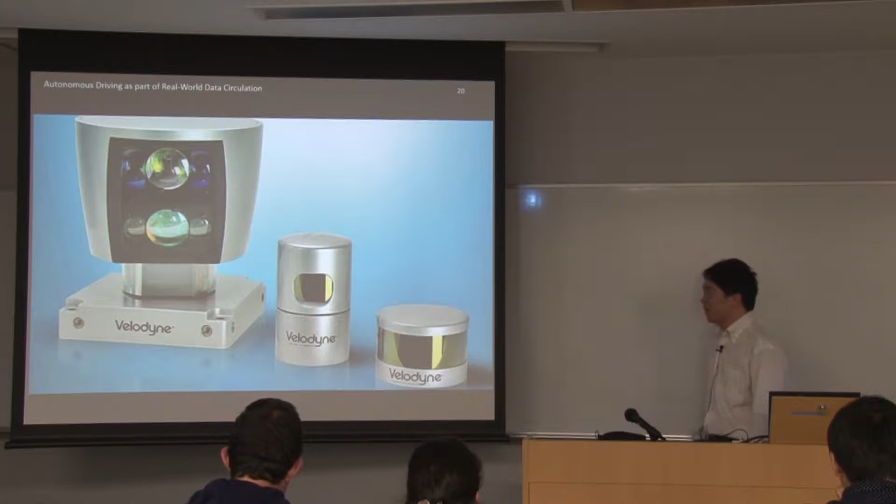This is expensive. So that's why you need a rich leader - asking him to buy one, and if it works, asking for another one, and another one.

And sensing is a hybrid of information science and engineering. When you buy sensors, you have to install them on the target system - in my case, which is a vehicle. So my student, every time we start some experiments, goes right on top of the vehicle and attaches the sensor to the vehicle, then finally we can start the project.

We did this installation every time for 2 years, but finally we got a garage, so we don't have to detach the sensor every time. We used to detach the sensor every time because I didn't want it to be stolen. Now we have a garage that can be locked, so we don't have to detach the sensor.

But anyway, some engineering happens if you work on data. So sensing is collecting data. And you may think that since you are in information, measurement, then you can assume that data already exists there. But maybe sometimes it's good for you to collect data yourself.

I think we did in Data Tools Next, using smartphones to get some GPS information. That was a good example of collecting data. But if you look at the real world, there are more case studies.

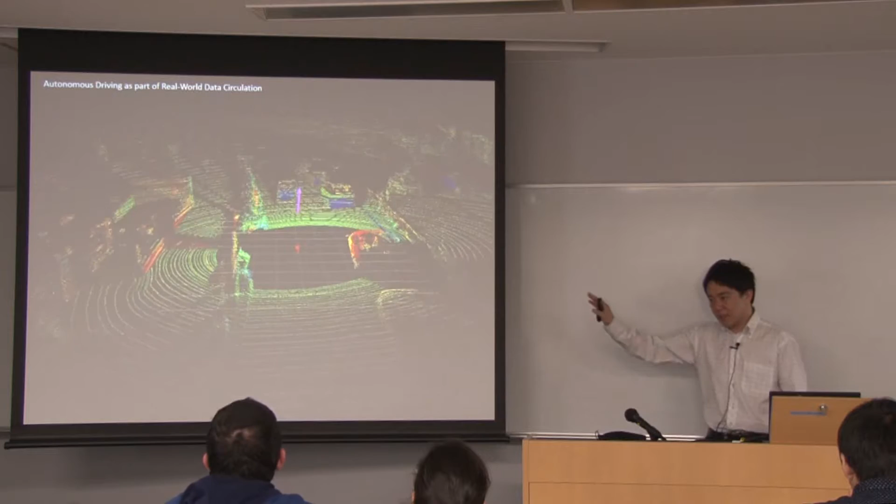For example, this is a scanning sensor. This scanning sensor can be physically attached to the target system. This is amazing because you don't have to write a single line of code - just attach the sensor to the vehicle, download some software, click a button, and then you get this information - three-dimensional real-world information obtained in real time.

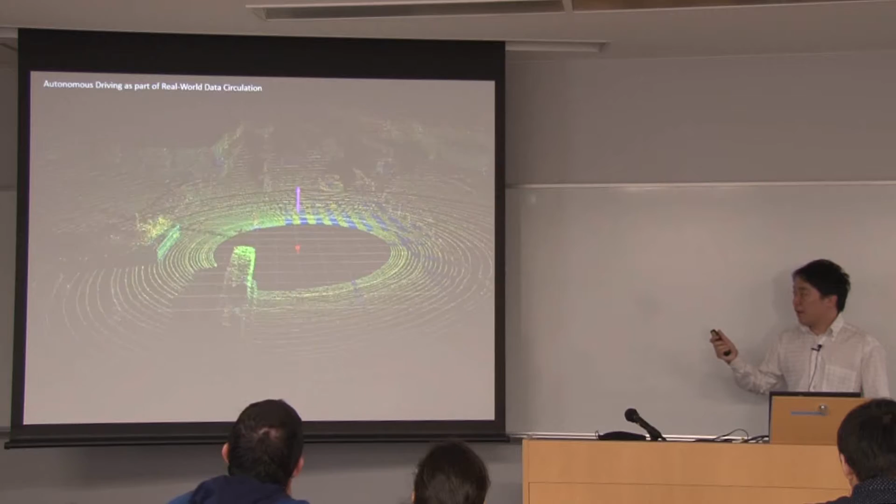And this is called a laser range finder, or LiDAR - laser LiDAR. There are a lot of names that represent this sensor, but this is one of the most amazing sensors I have ever used.

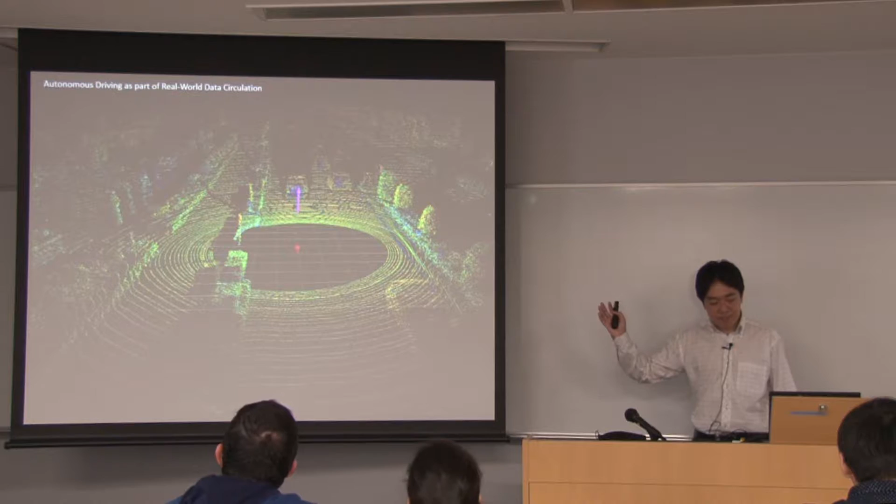So we want to use this kind of data for something innovative. One thing that actually first came into my mind is to detect your location using this sensor.

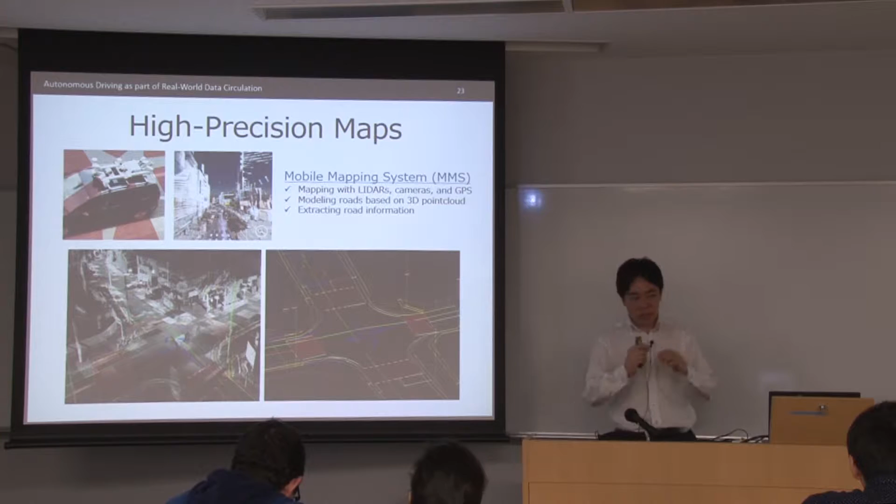So again, this is the problem of managing data. In my case, we use a digital map, three-dimensional maps. This is a collection of points. If you store this data into your computer, then you can manage, for example, the shape of road, or the shape of buildings, or the shape of the real world in a computer. Since this is three-dimensional, you can change the angle of the data.

This is amazing to me, since I was not very familiar with data management. But when I asked some company to make the three-dimensional map of this, Motoyama Road, they just gave us this map. It was surprising to me that this is already possible in industrial service.

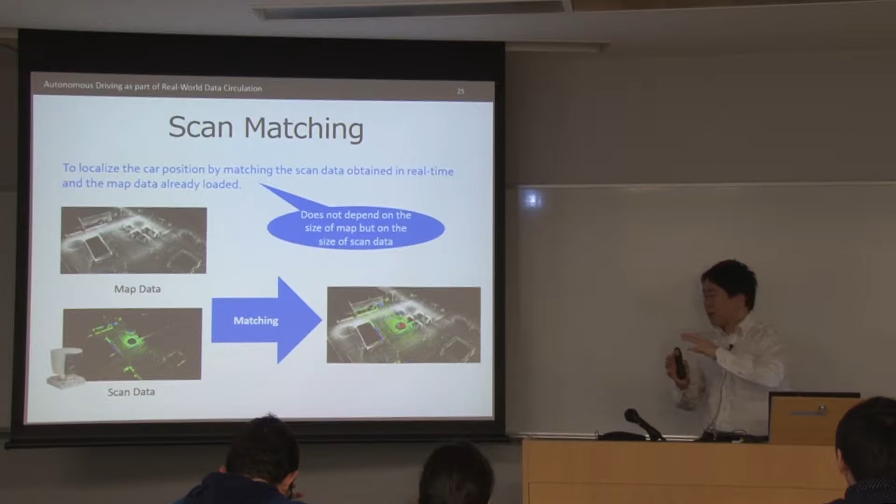Once you have three-dimensional maps and you also have sensors, if you do matching of real-time sensor data and map data, then you can find where you are. Real-time sensors can obtain the shape of your surroundings in real time, and you also have three-dimensional maps. You can find where is the most matching place to the data which you got in real time from sensors. Then, for example, hey, we are here, which is called scan matching.

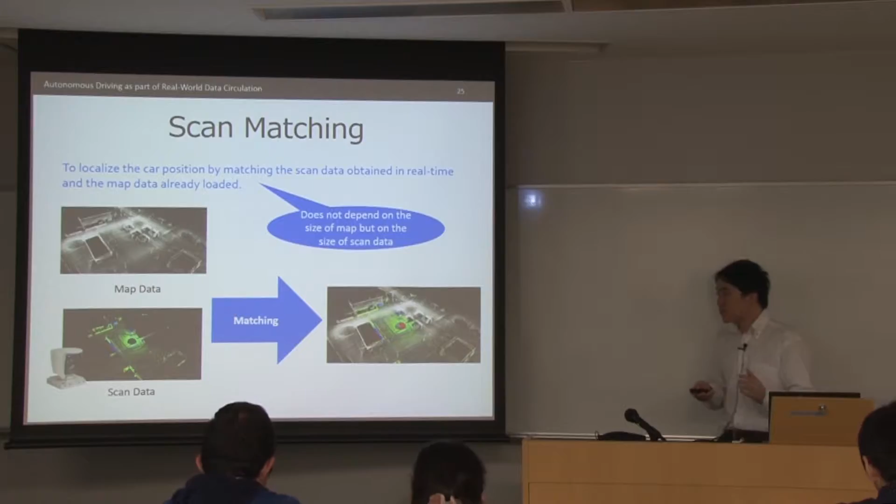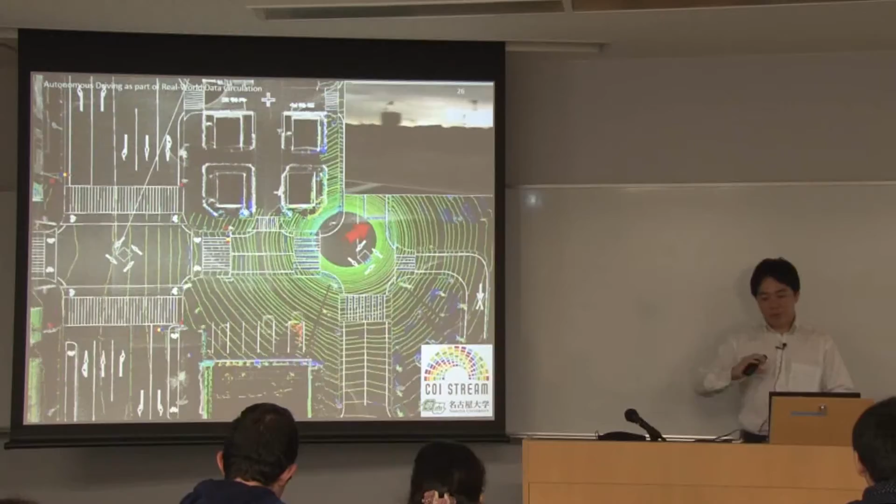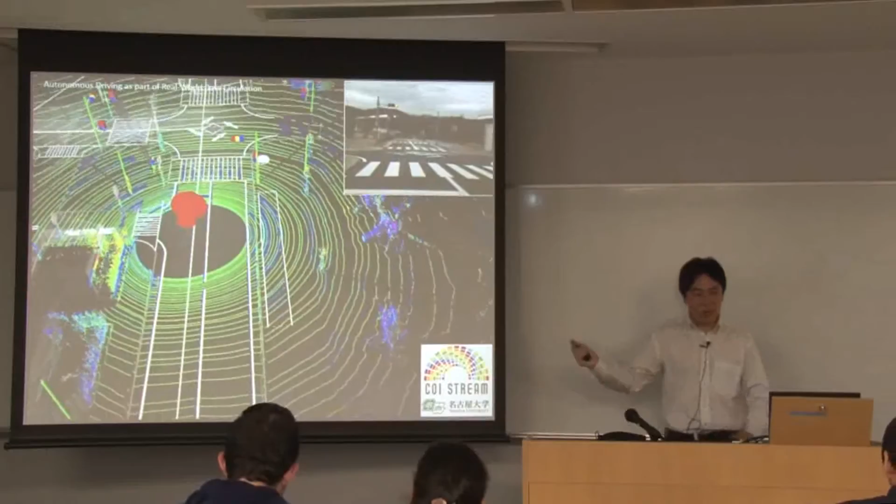And this works very well. So this is our test course, and we made a map of the test course. Then we check where you are driving by using real-time sensors. By the way, this is made by Kitsukawa-kun, one of my leading students. And we can actually locate your position within an area of 10 centimeters.

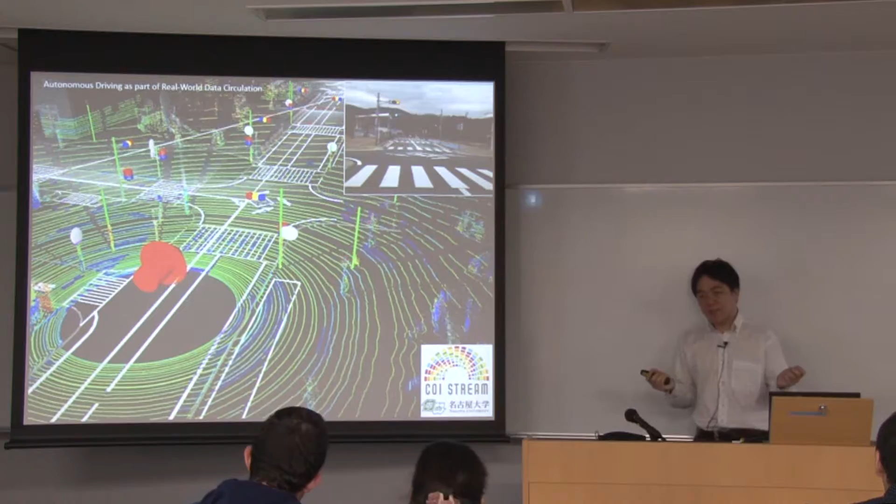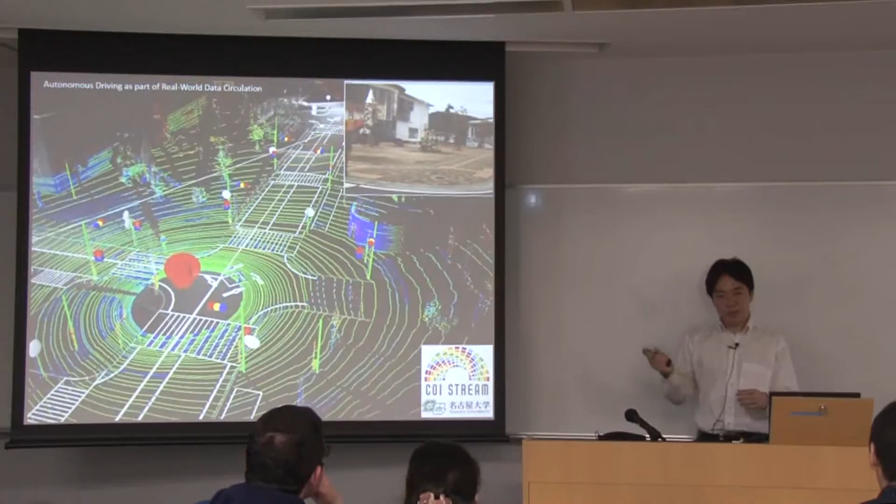It's really precise. If you buy expensive GPS, which, for example, military is using, still you can only detect your location within an area of 1 meter. So using sensors and a three-dimensional map, you can get almost 10 times more precise localization or positioning.

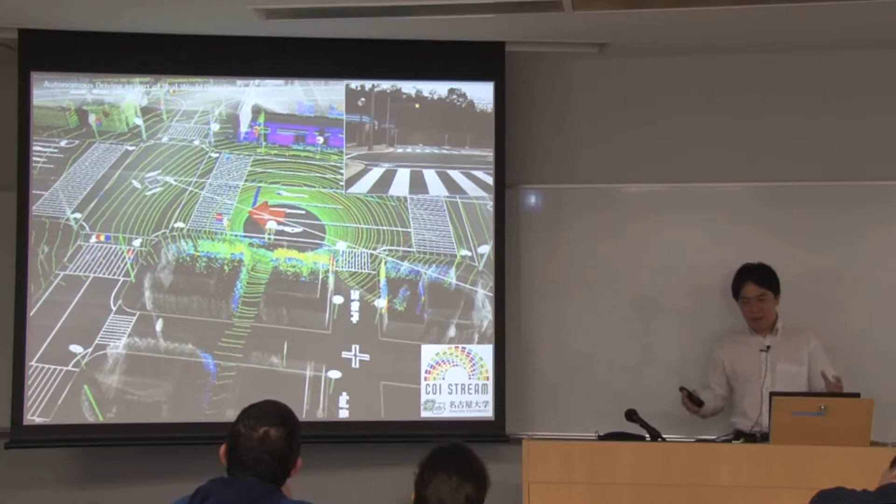It didn't really take so long for Kitsukawa-kun to make this, because we have a lot of tools and software. Since you have a big team, if you ask your colleagues what kind of software or tools would be useful for doing this, everybody can tell you. So you can save your time to build this kind of system, compared to the case where you just work alone. That's why I also recommend that you work with some people, so you can save your time.

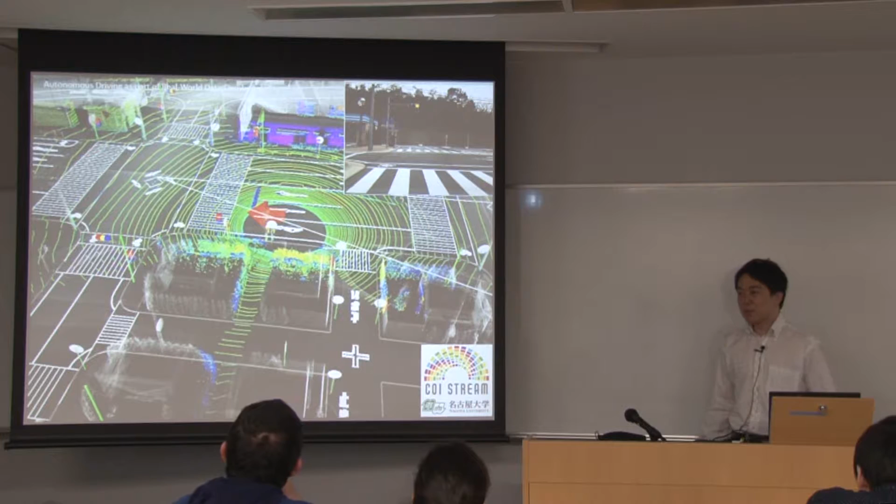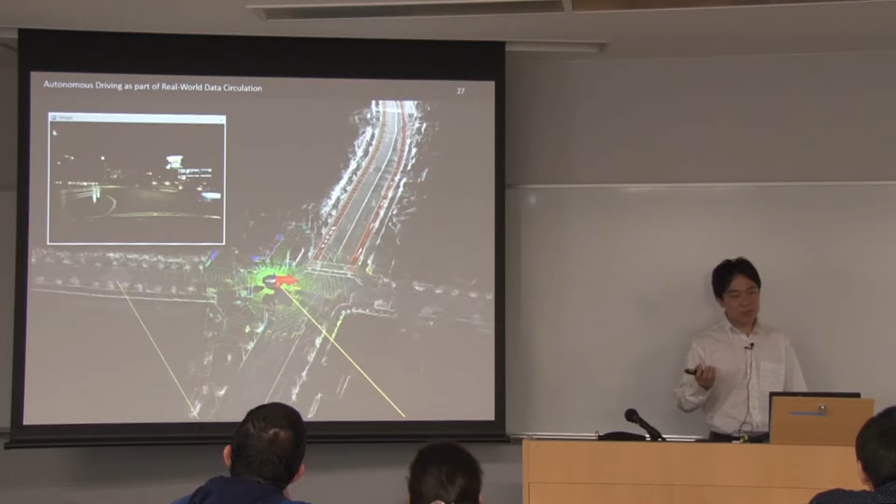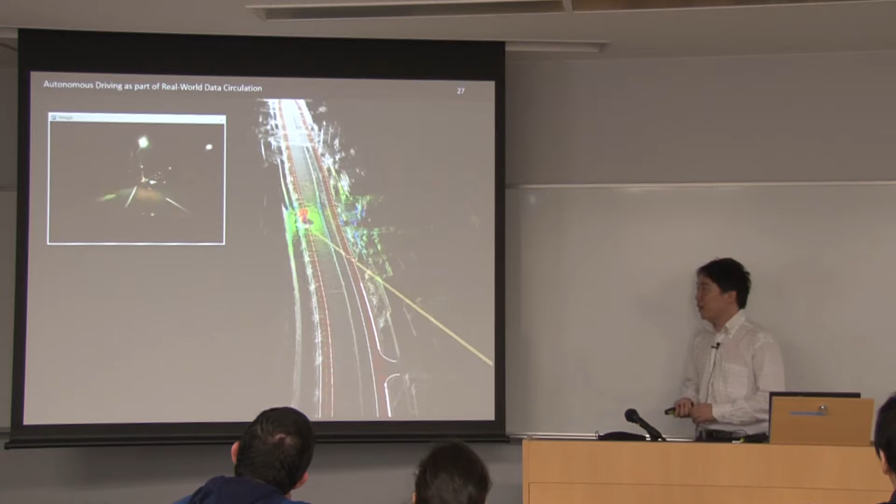Once the experiment in the test course succeeded, the policy of my team is, let's go for the real world. So this is the real world, and actually not in daytime, this is almost midnight. Cameras cannot see anything, but this sensor is intelligent. It doesn't get affected by darkness. It can still detect where you are. So even at midnight, you can drive autonomously, recognizing your position precisely.

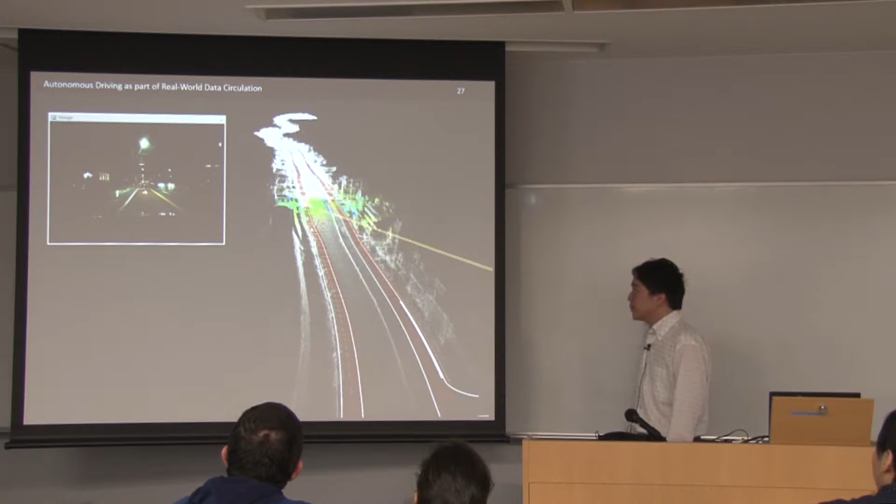The question is, I don't want to ask some company every time to make a map. So I asked Kitsukawa-kun if he can build a three-dimensional map by himself. He spent a couple of months, and he actually did it, also supported by a lot of teammates in my team.

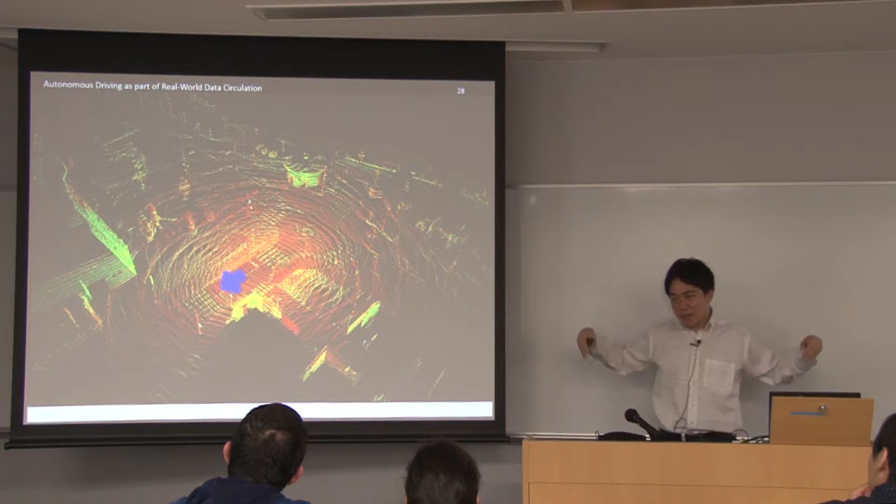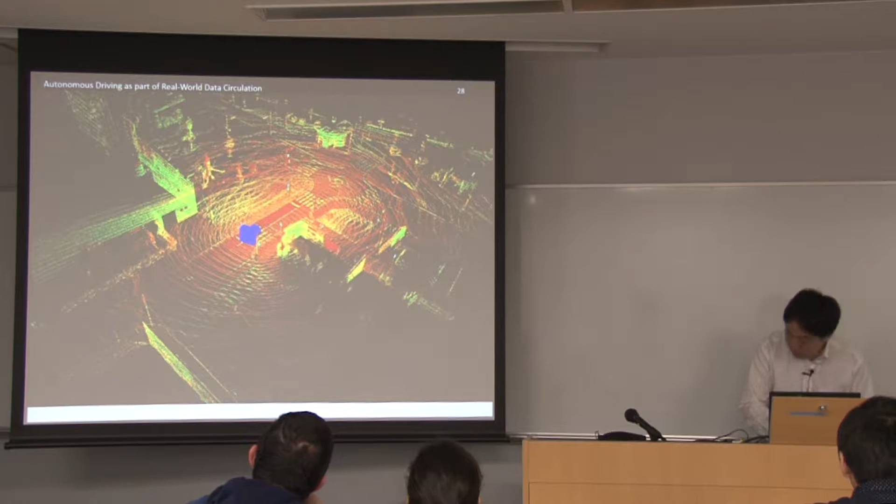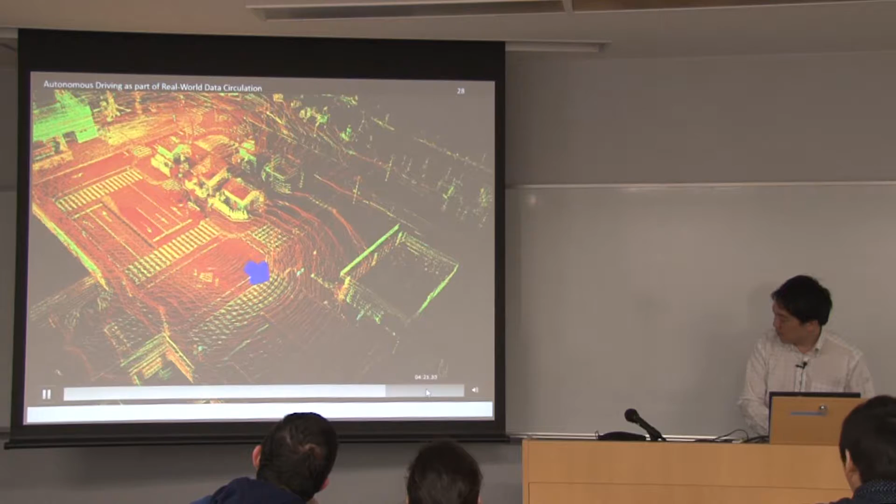Since you know where you are very precisely, you can just keep collecting the data from sensors. And if you keep collecting three-dimensional data, then just wait a few minutes. You have this. You have this. And you have this. So when we asked the company to do this, it took a month. But using information science or information engineering, cutting-edge technology, it took only 3 minutes.

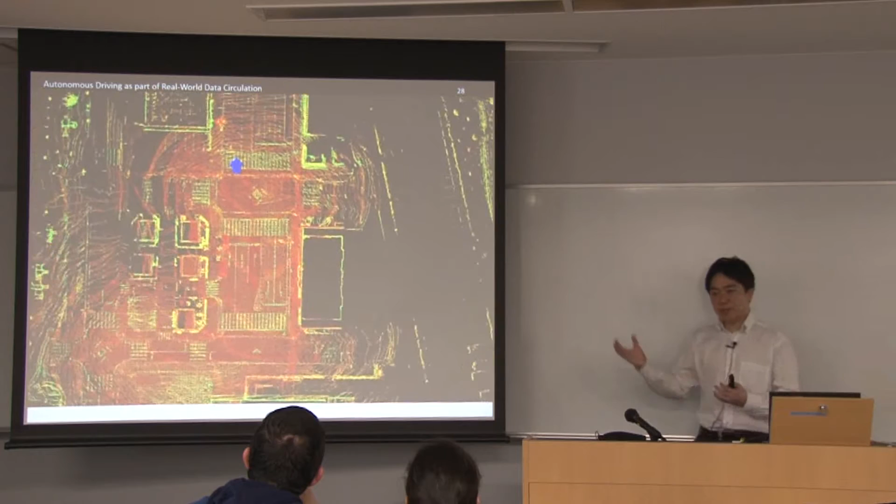So this is going to be good collaboration between university and company, because the company was surprised by this demonstration, since they take every time 1 month to build a map, but Kitsukawa-kun just did it in 3 minutes. So now we are planning to sell this technology as a product. Since you are in a leading program for industry, it may be a good experience for you guys to find companies which can collaborate with you.

Then try to make a service together, and you may be very happy if your skills and your research project can be translated into the real world. So what the company wants to do is something like this. The company has a dense, precise map, which they developed, taking a month. But sometimes the map is not complete, so we can complement this three-dimensional map by using real-time data.

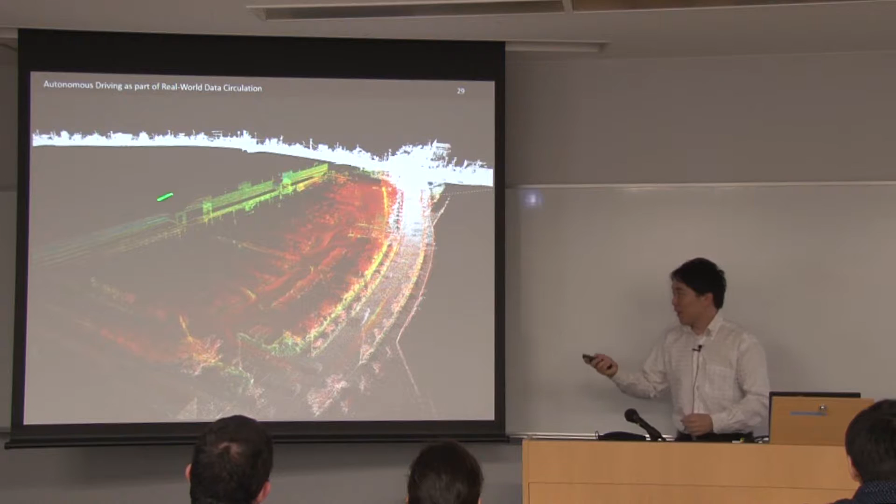To make this map, the company actually uses a specialized vehicle, which costs $3 million. So they don't want to bring a $3 million car to map a small space, because it's very risky. So we can use maybe less expensive sensors to complement the data.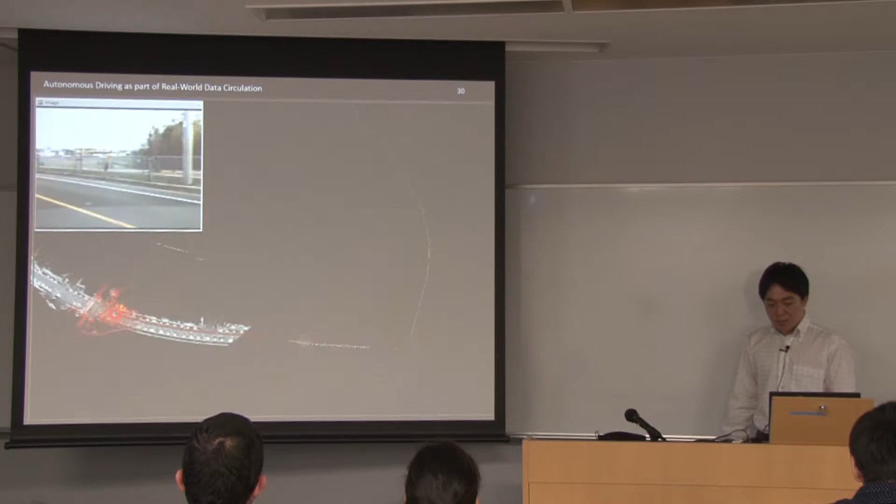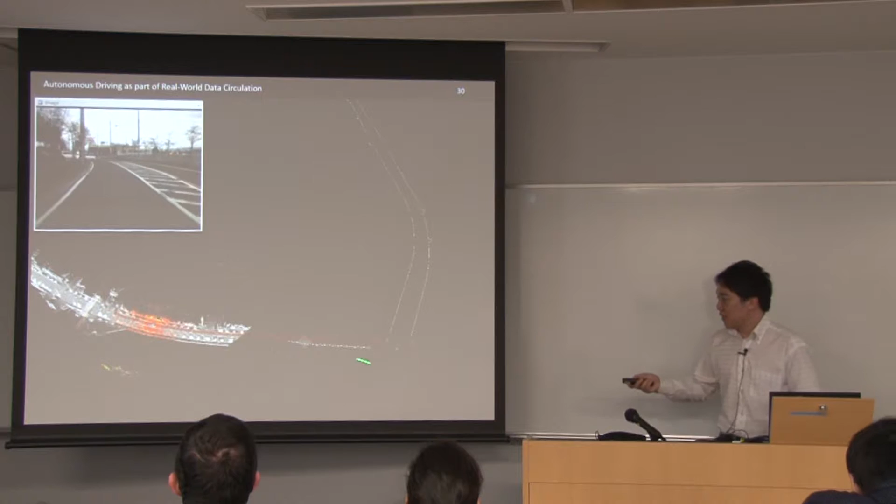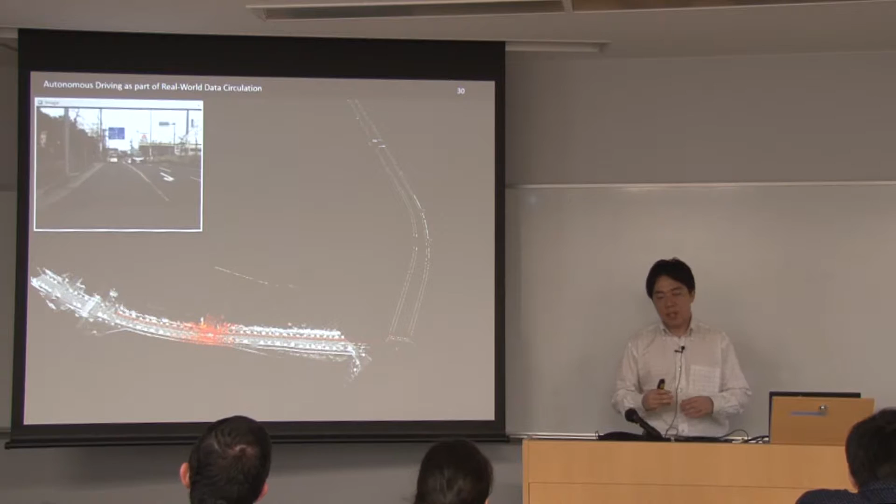So this is maybe the final thing I can introduce, also made by Kitsukawa-kun. Since this map data is heavy, it could be a few hundred megabytes, or even a terabyte, if you want to cover the whole area, say this is Moriyama district.

So the idea is that you only need a limited space of three-dimensional map, where you are driving, and you can update it. Since you know where you are driving, you only need data, for example, in the range of 300 meters. So you can keep updating the data and kill unnecessary data, saving a huge amount of storage and memory, but still do the same thing.

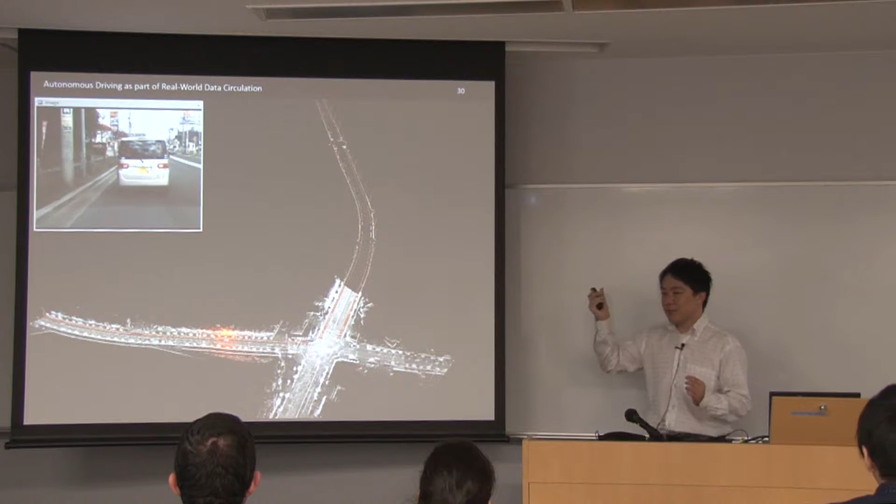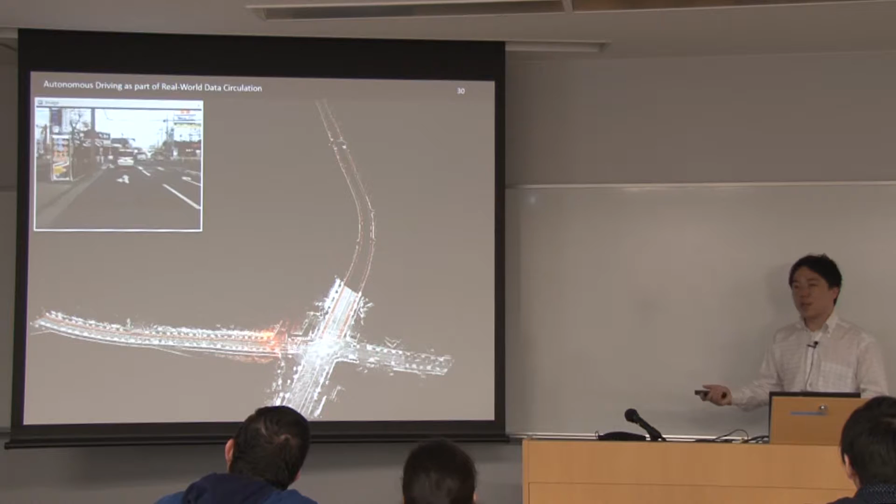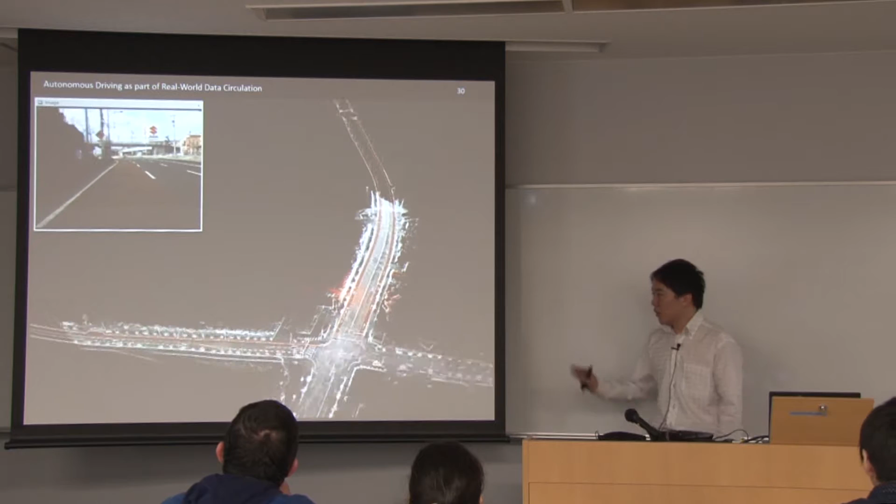So this is, to me, a new idea. Just using a three-dimensional map and real-time sensors to match your position may not be brand new, but it's an update. We call it point cloud data. Updating point cloud data, as far as I know, has no technical papers yet, so this can be a research project and publication, which we are working on right now together.

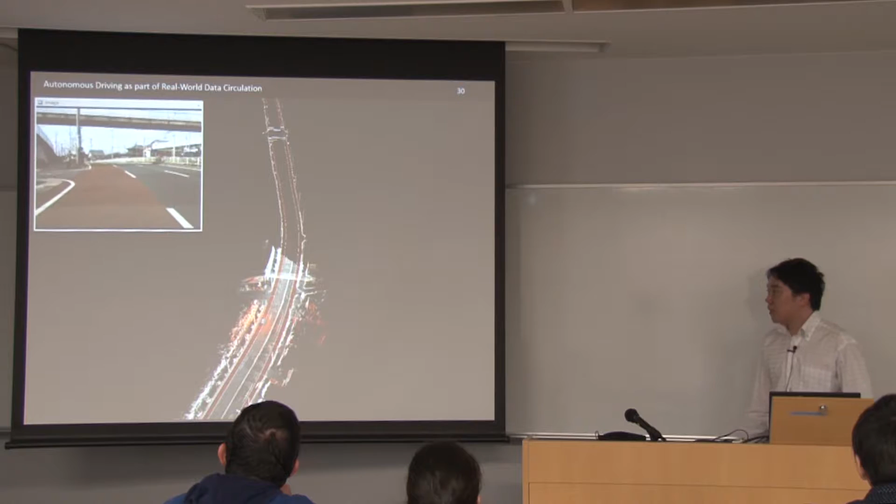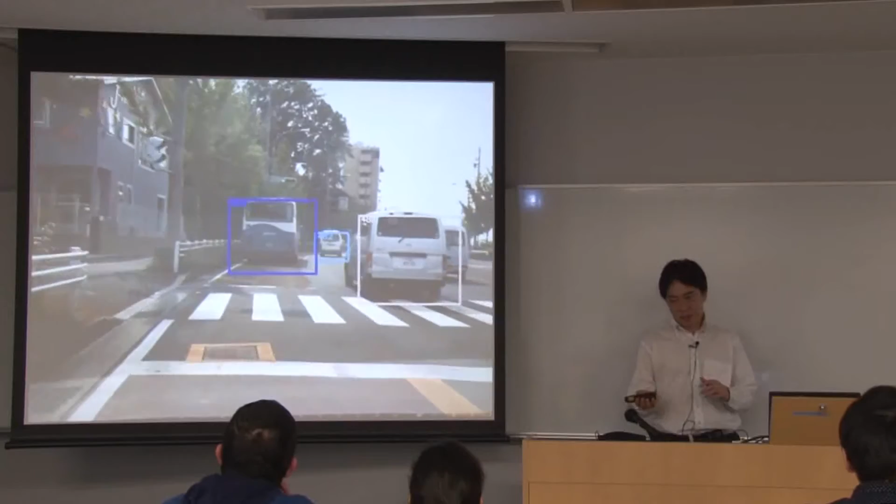Now let's switch. Since I'm talking about autonomous vehicles, location is not everything. Once you got your position precisely, what you want to do next is detect your surroundings. This is Abraham's project, detecting vehicles or pedestrians in real time.

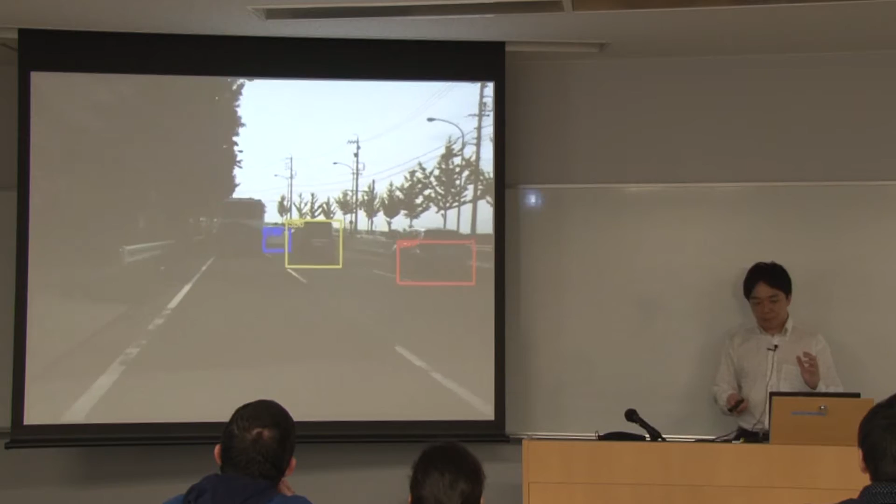I can skip some details, but we use traditional approaches to image processing, though we use GPUs. GPUs are special devices that I showed you in the earlier slide, with more than 3,000 processing cores on a chip, so it's high performance compared to common CPUs.

In most cases, we get improvement in performance. Since image processing is time-consuming, if you use your laptop or desktop PC, it doesn't finish in a second for some cases. You know for loops, right? If you do programming, you do for loops for repeated processing, but it takes so long. If you have 3,000 cores on your system, you can reduce the time of this repeated procedure.

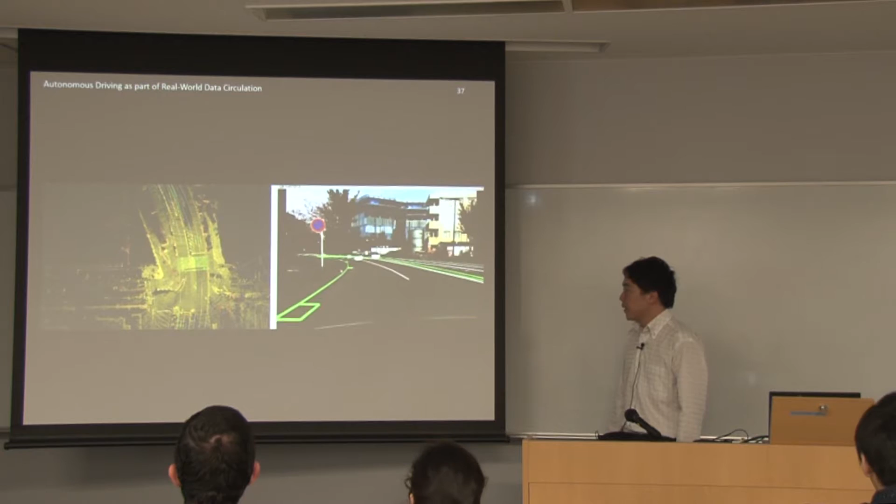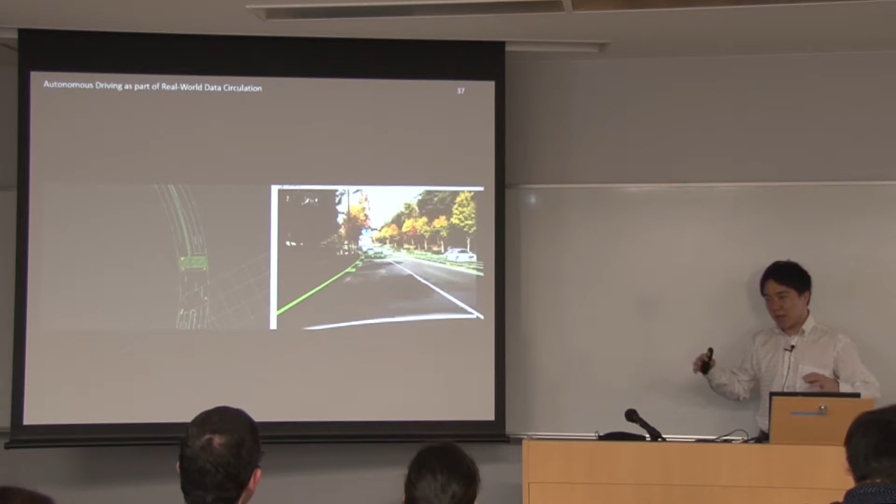This is another interesting idea of using different sensors. You have an image, and you know your location precisely thanks to the real-time scanning sensor, and I said we already have a three-dimensional map in your system. So you can put the map information onto the image.

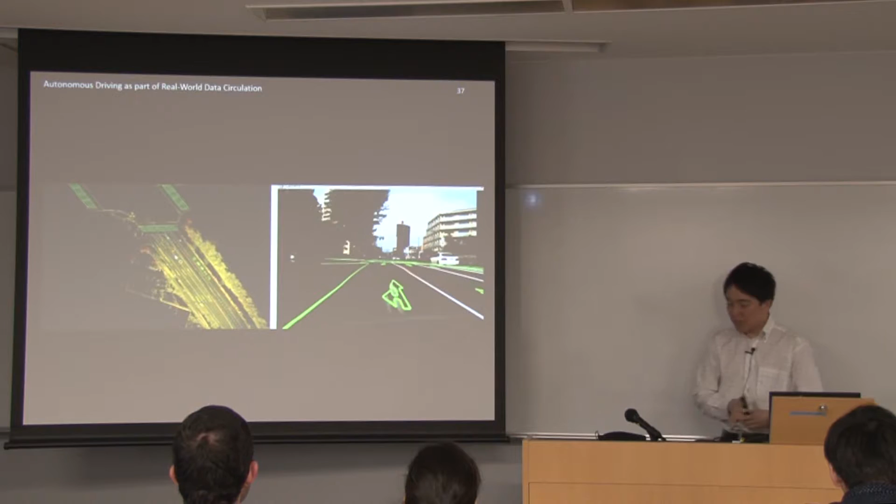So we don't detect lines by itself, we just bring the information from the map to the image. Then you can even find where the traffic lights are.

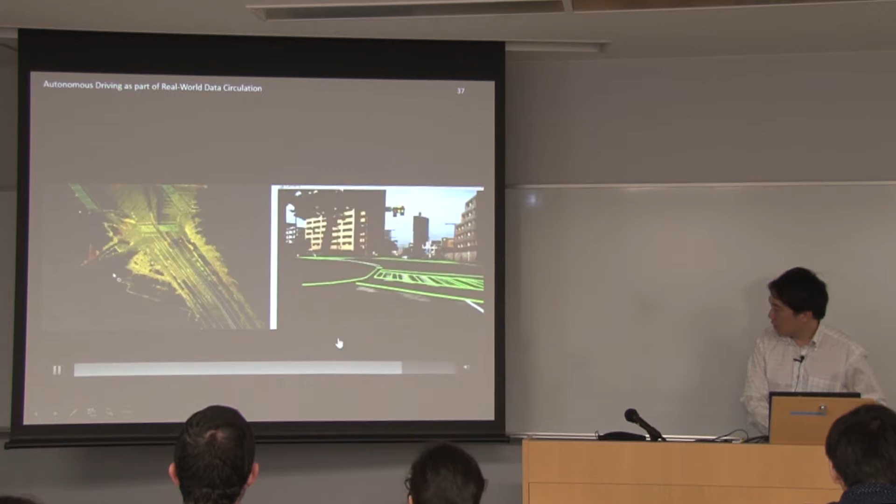It's difficult. You know where the traffic lights are on the image. If you don't have sensor fusion, if you don't have different sensors, you can do this by image only. But sometimes it's not productive because image processing by itself is a heavy, time-consuming task.

Maybe we want to focus on just detecting moving objects by camera image, and other information we want to map from the map. You don't have to detect it yourself. Just look at the map and put the map information onto the image. Then you know traffic lanes, traffic lights, zebra zones, and so on.

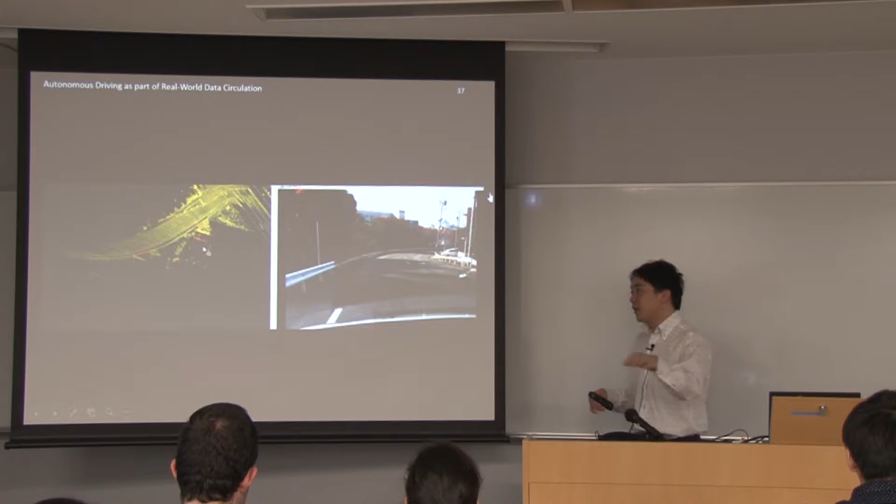So there are more data issues. I like to use smartphones because it's easy for students to start with. So in our system, we use smartphone car navigation software.

Since we have a rich system, now a lot of companies want that system. So if I ask some navigation company to give me the source code of their product, then I can let them use our autonomous vehicle system. So it's a good negotiation. Now we have the source code of car navigation, and we can modify it to connect to our autonomous vehicle system. So you don't have to draw a path yourself. You can just choose the destination and the source location, use the car navigation's function, and get the route. Now our autonomous vehicle can just follow this route.

So it's now a total solution, not only individual technical components, but now we have a kind of whole total solution in the system. I can skip how the car navigation is merged into the system, but what I want to talk to you about is that now we can even combine smartphone applications with the autonomous vehicle.

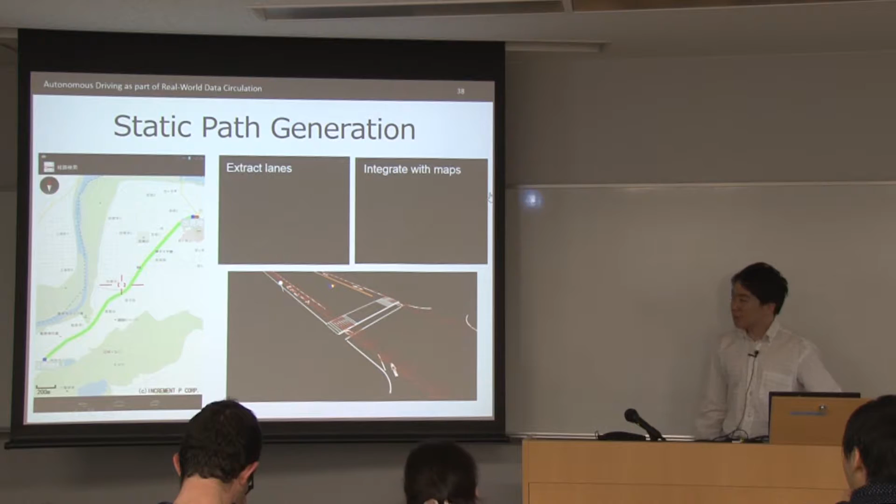This is not really... well, still. Once we get a route to the destination, now you can just follow this route.

So now it's our time to search for some papers, to check the distance, and to check the route, to find what kind of algorithm is good for tracing the route. We found a famous algorithm presented by CMU, one of the top schools in the world, which looks very reliable.

So we adopted this algorithm and implemented it in the system. We can skip the details, but what we are doing is just assuming that this is a route, and putting some points every 1 meter, for example. Then just keep following these points.

Maybe difficult to see, but this green line is a route, and this blue point is the target point that the vehicle is moving forward to. So just keep updating this point, and the vehicle just follows it. Then it reaches the destination. It's kind of an easy idea to get to the destination.

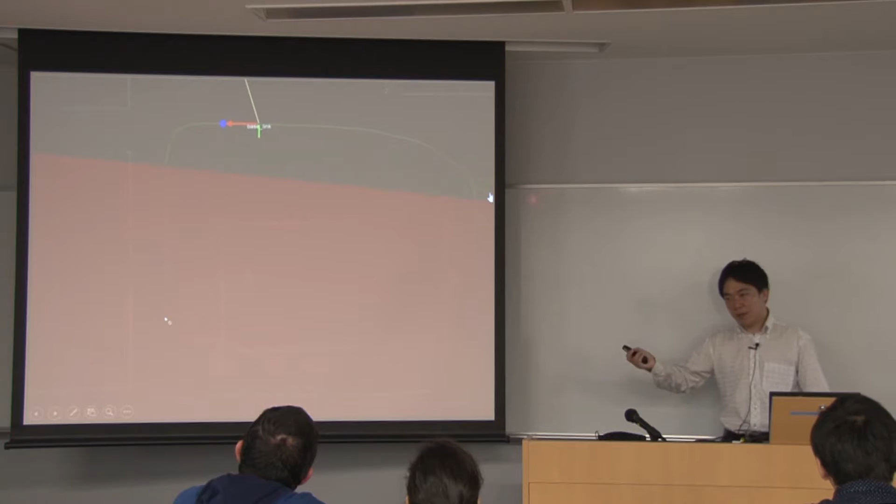And of course, if a pedestrian or moving vehicles are on the way of your path, then you have to change this path dynamically to avoid the moving objects.

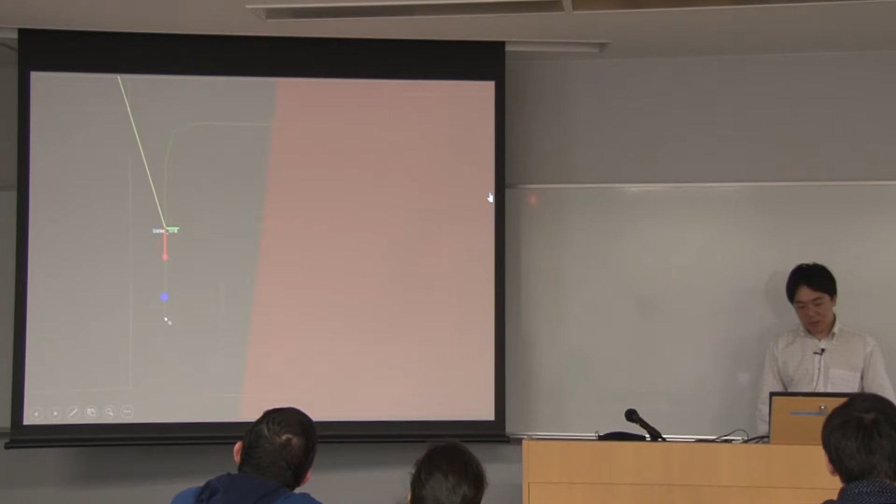So now, as I said, the students are working on individual components like localization, object detection, and so on, and computing platforms. But as a team, we are collecting the whole functions into one system as a total solution. Maybe this is too detailed for you because you may not have a computer science background, but this is the total system that we have.

Hardware, software, applications in a vehicular system. And we also do some projects to interact with humans and pedestrians, then collect these pieces of data in a cloud or internet system. And since we are computer science, I like to focus on security, safety, performance, power, reliability, and so on.

And my expertise is software. So we design the software to achieve the autonomous vehicle. Sometimes we didn't have the control function, but we design the software first. Then, according to the design, we organize a research project, and now we are adding more functions to the system according to the design.

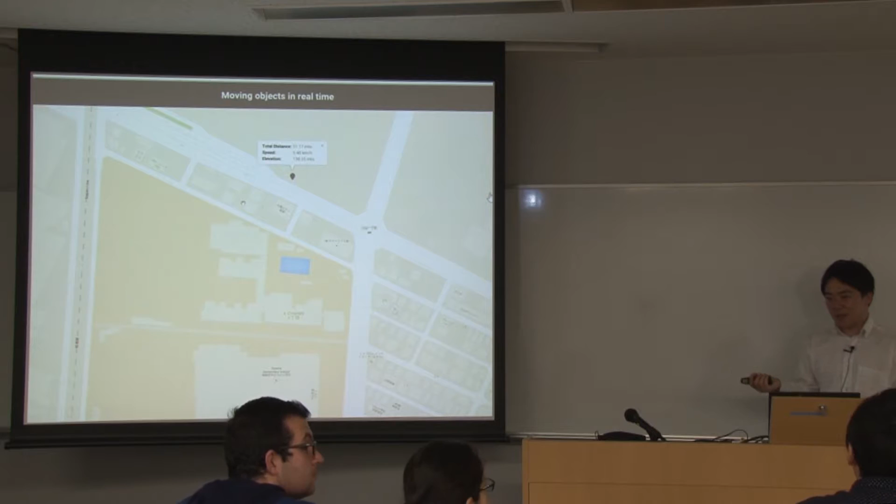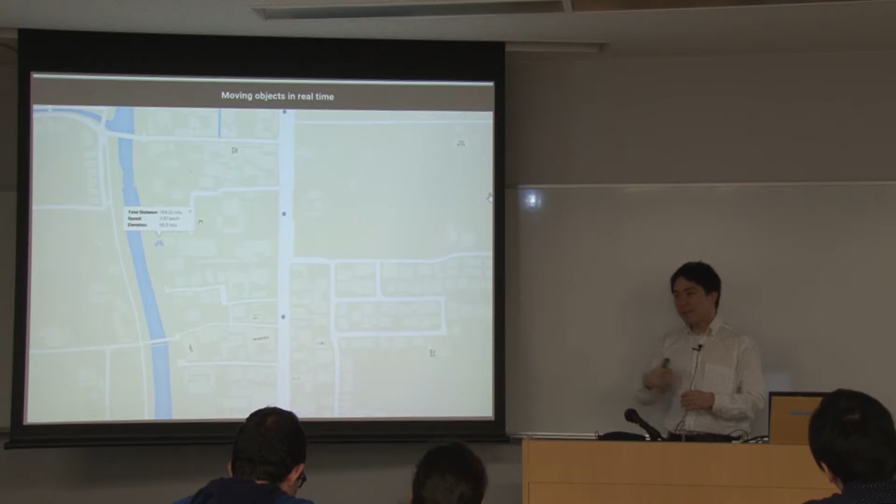So here is one demonstration of what we can do if we have a lot of data. This is actually done by Patty. You know Patty, right? She was a lecturer of Data Tools Next. She's making a data management system, collecting data, actually the data set comes from a past project, but she's generating the same data set in real time into the database and visualizing it on a central server.

Now we can look at, say, some person moving on a particular place, which may be useful to predict where we will be crowded in a few minutes or a few hours later. If you can predict traffic jams, you can change the route so that the whole traffic system can be more efficient. Since traffic jams waste a lot of money and time, they can actually be avoided in most cases by knowing the locations of moving objects.

So this is one possible application of managing data from the real world. Since this is a two-dimensional map, which is actually Google Maps, now we want to use three-dimensional data, the same information of moving objects, but plotting it on different maps which we made ourselves.

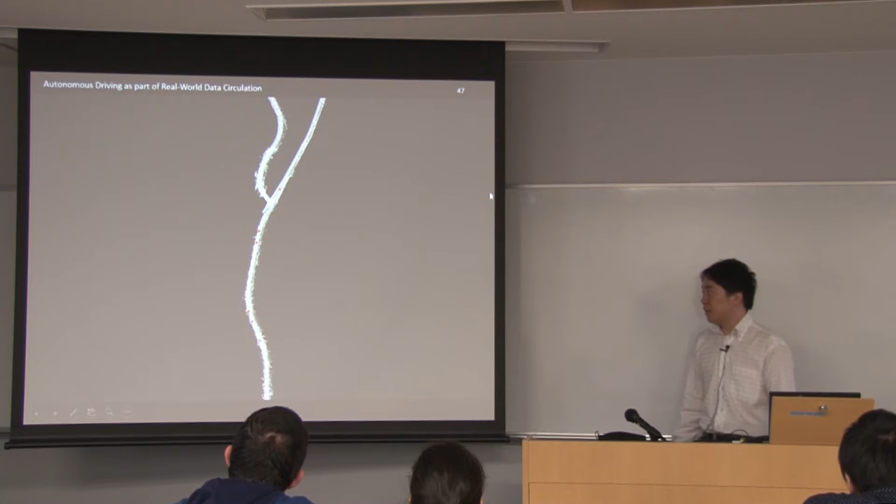So it's a three-dimensional map. We exactly know where the lane is, we exactly know where the traffic light is, and so on. We need to improve, we need to actually analyze and correct the locations of moving objects, because these data sets just come from the smartphone, for instance, but smartphone GPS is not precise at all. So we may want to use some data analysis techniques to correct the positions of moving objects so that it can better fit the actual place, but this is work in progress.

So we're going to make intelligent filters to correct the positions of moving objects so that we can totally understand how moving objects will be moving in the future. Predicting the future is important for intelligent systems. Humans can easily imagine what would happen in a few seconds, but for computers it's difficult to predict what would happen in the future. So we need a lot of research projects to make intelligent data analysis techniques. For my case, it's autonomous vehicles.

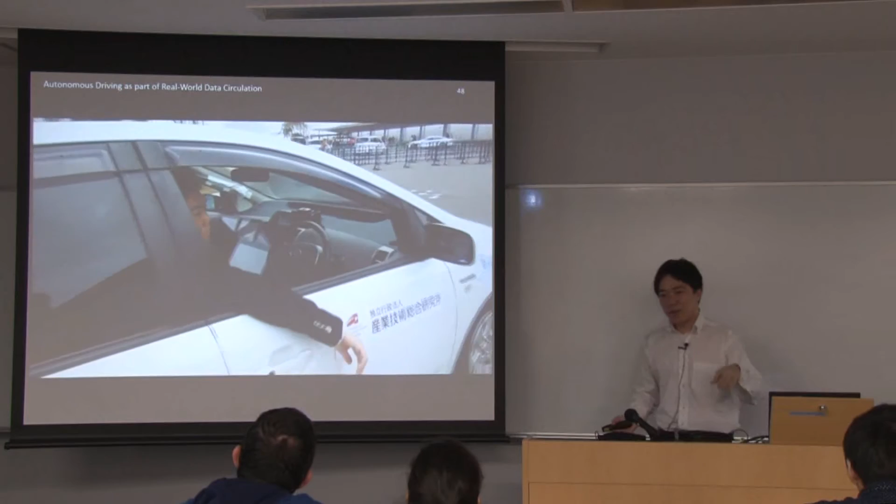And I like demonstrations again. Since I have smartphones or tablets, I don't have to touch the vehicle to drive it. Just 3 clicks, then your vehicle is driving. I keep tense because something bad might happen, but I pretend to be very safe. So it's for demonstration, and if you look at this video, it looks like this technique is interesting and useful for the real world. But for us, we keep tense, because once something bad happens, the project may be finished. So the demonstration is kind of risky. It can attract people, but if you fail in the demonstration, you may lose some people. But I like demonstrations anyway.

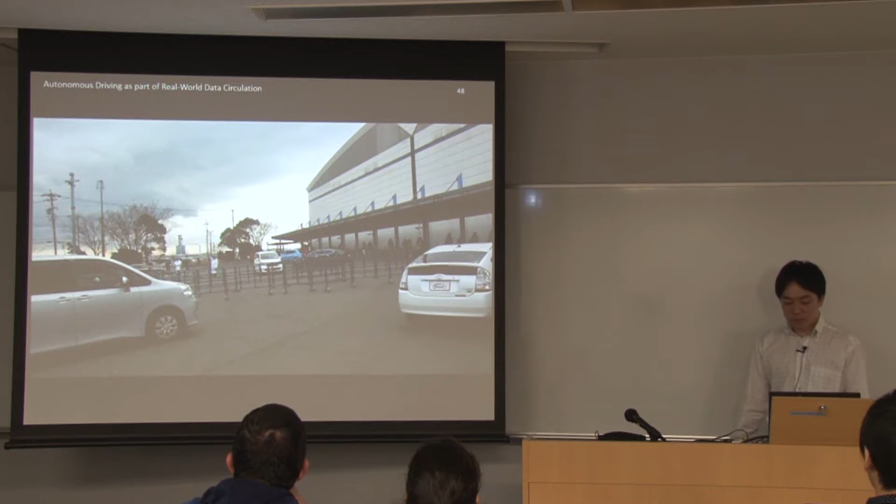And recently we are now doing experiments on a public road. This is Moriyama district, and we just drive without touching the vehicle, understanding the location of the vehicle autonomously and controlling it, for instance, stopping at the traffic light.

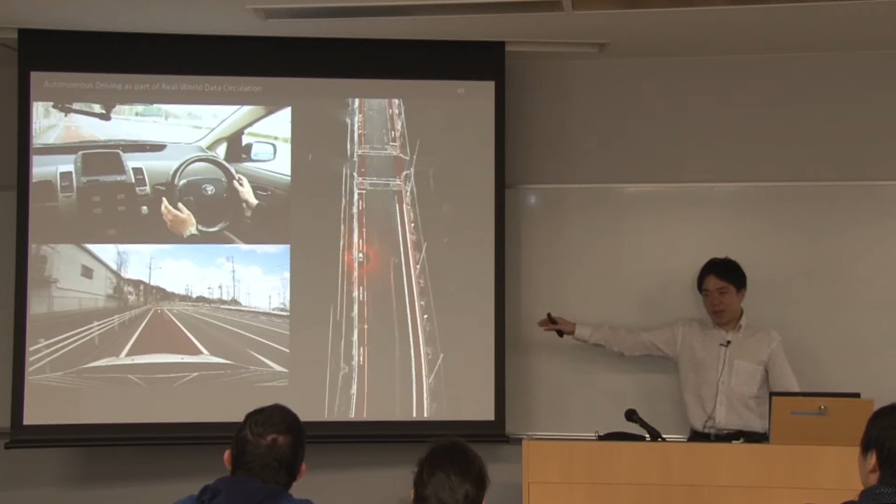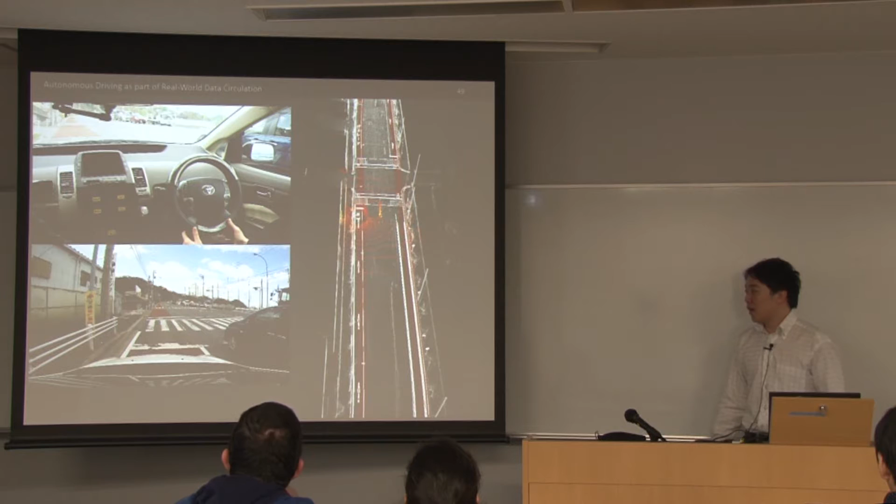If you do this without telling the police, you will be arrested because you violate the regulation of the law. So what I did was talk to the police for 1 year and try to make them understand this is a necessary experiment for innovation, and that it's not dangerous. It might be dangerous, but I just told them it's not. And I said if you let us do these experiments, Aichi Prefecture will get more attention from other prefectures. So something like that.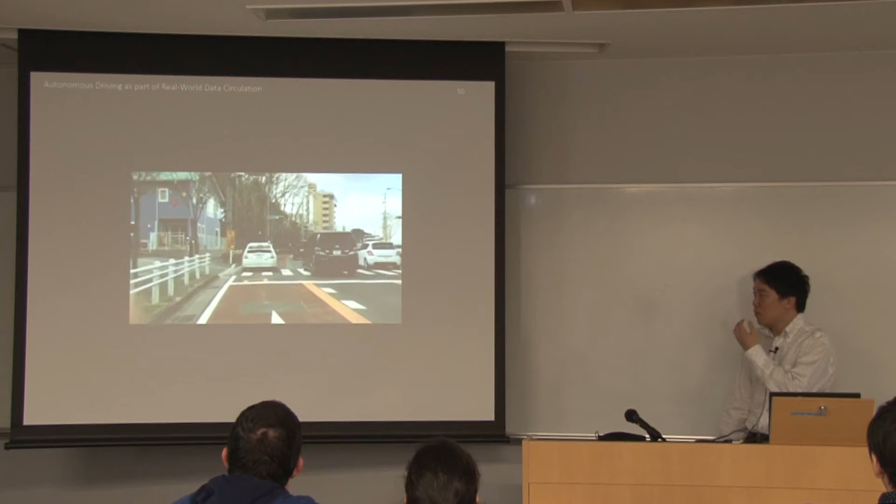We are getting used to the experiments, even though there are plenty of vehicles driving nearby our vehicle. We can still do autonomous driving. It looks like driving slowly, but that's just because of them. I realized that in Nagoya, people drive a little bit fast, so it looks like my car is driving slowly. But this is actually 40 to 50 kilometers per hour by autonomous driving.

Now, if you keep doing demonstrations, somebody reaches out to you. This is Terebi Asahi. Since autonomous vehicles are not in production yet, it's a good topic for them.

By the way, this is Subaru EyeSight, if you know it. And this was 2 years ago, or 1 year and a half, almost 6 months after we started the project. So we didn't have a lot of functions at this moment, but we tried to do the demonstration anyway to make it look as if we were already complete.

Now more media just reach out to you, I think, if you succeed at the demonstration. This is from last month, I think - Tokai TV or Nagoya TV, I forgot which. I did a demonstration in front of 200 people, which was also impressive for the media. And this is a scanning sensor, which they're not familiar with, so it's a good topic for them again.

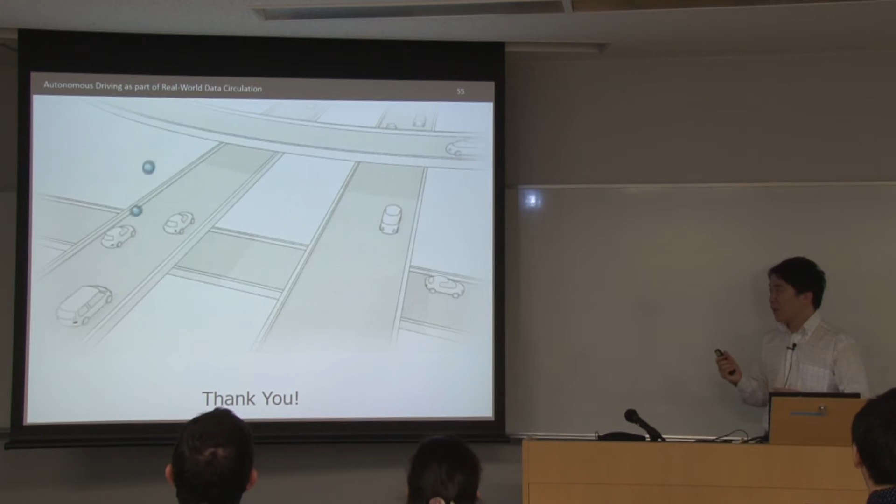This is what I can teach you - how data circulation is related to autonomous vehicles. Actually, not only autonomous vehicles, but also any robotics or social robotics applications may appreciate this data circulation. That's what I believe.

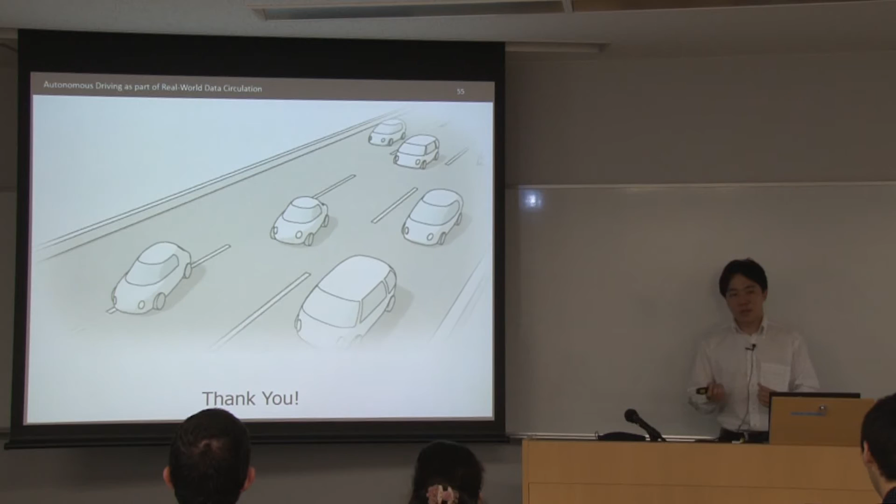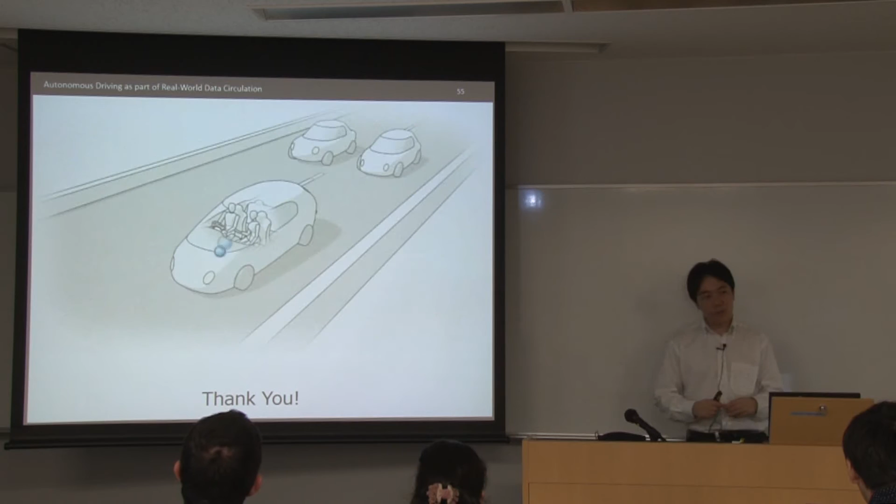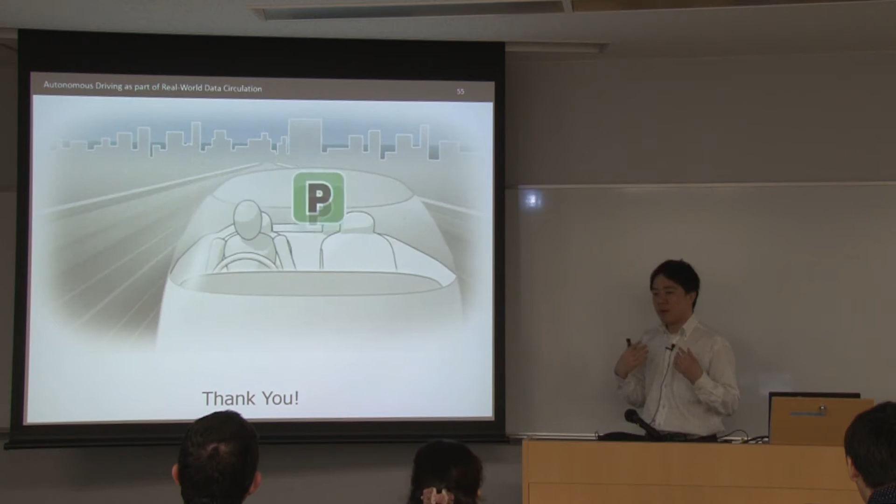Okay, and also, this is the last one - having a vision of what you're doing is also important. If you don't know how useful your skill or your research project is, then you may be lost at some point. Just keep having some big pictures and a clear vision of how your skills and your research project can be useful for something - could be society, could be humans, could be life, anything. But you have to keep in mind how your research projects can be useful for some applications.

That's what I wanted to talk to you about. And this is Nagoya University's concept of social driving - not only on the internet, Facebook or Twitter, but maybe moving objects can also connect to social networks and exchange information.

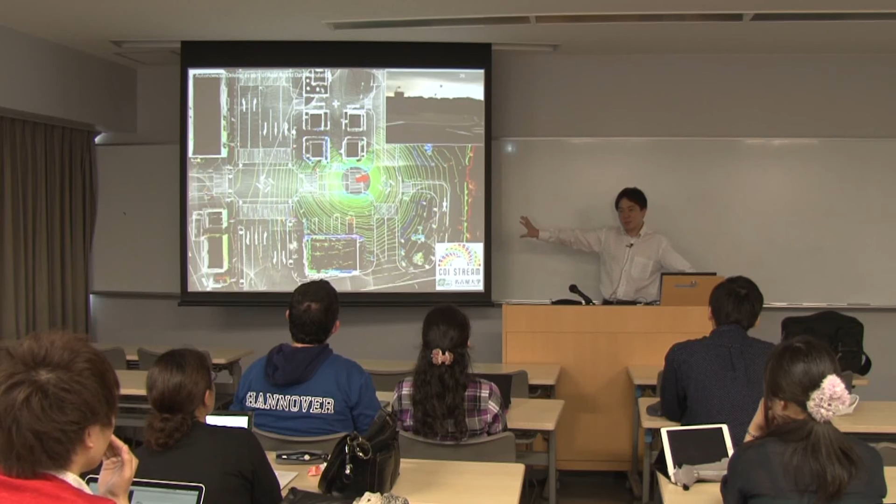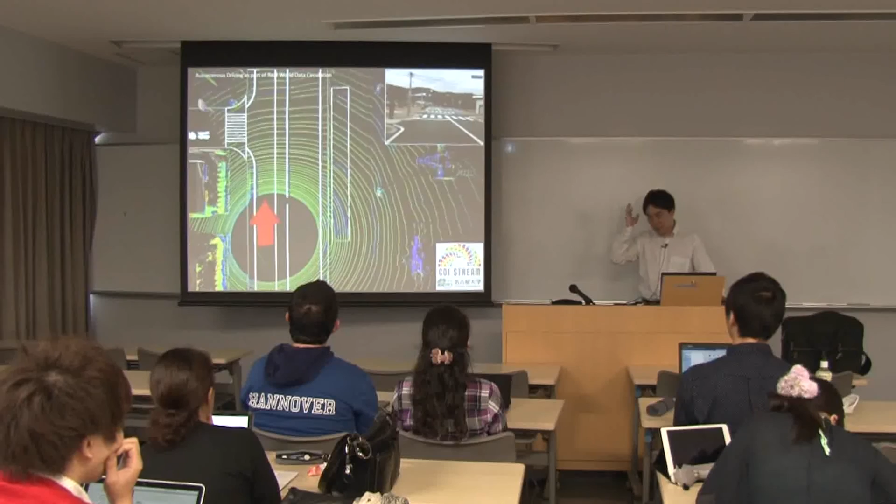So for the first question, maybe this is an advantage for us because nobody else can do this. Three-dimensional maps are minor, so not so many people have the three-dimensional map, and scanning sensors are also still minor - only selected people or a limited community have the sensor. So combining the two and detecting your location by 10 centimeters is something almost nobody else can do. I believe this is a clear advantage we can provide from our system.

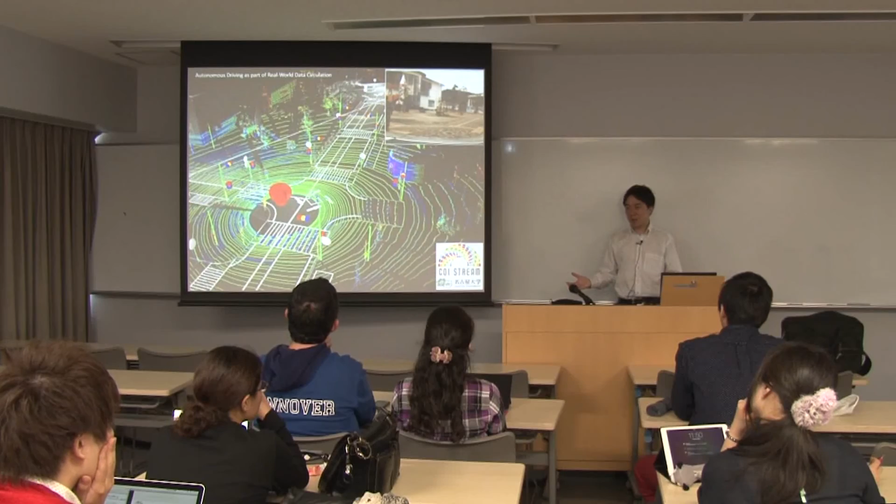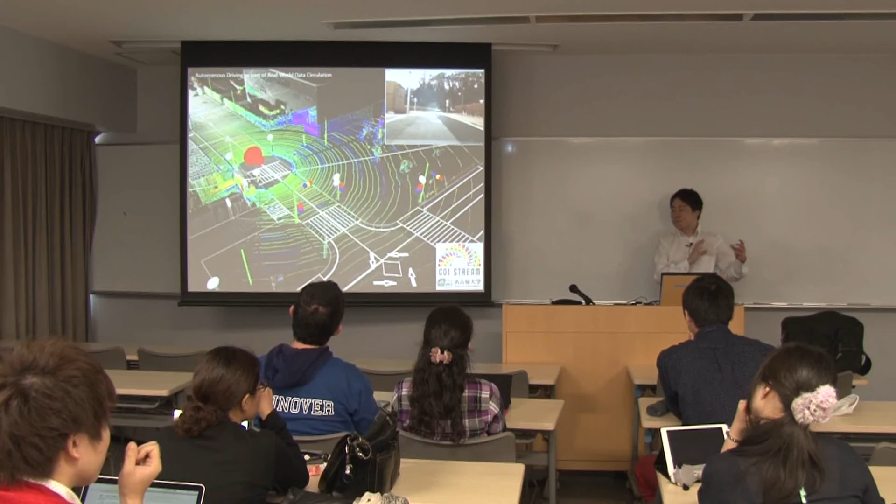And also we do this as a total system. I don't know any other institute that does this whole system with a single team. Some universities do image processing, some do localization research, but as a total system of autonomous driving, I think only our team can handle it.

And for the second question, I think maybe it's misleading - if it's really minor, then you don't have to do it, right?

If it's minor in the sense that you don't have a lot of people, then this program is very useful for you to find friends or teammates if they are looking for similar techniques that you have. If the research topic itself is minor, then I think you have to change your topic. But if it's just a minor community, then it's a good opportunity for you to find somebody who wants that technique.

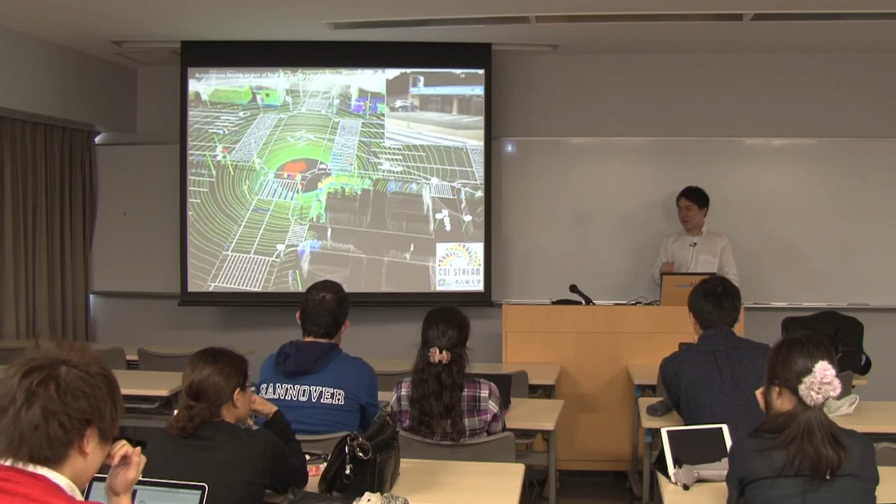One specific example I can give you is speech recognition, which maybe you guys are doing in a lab. It plays a vital, important role in automated systems, because we use smartphones since we don't know how to do speech recognition or face recognition, so we use touch interfaces instead. But if you have a good interface for speech recognition or human recognition, then you don't have to touch the vehicle. You can just smile or talk to the automated system, and it can react to your mind—taking you where you want to go. You don't have to put in a destination by text, just by speech.

How do you detect or utilize information from the traffic light or traffic sign?

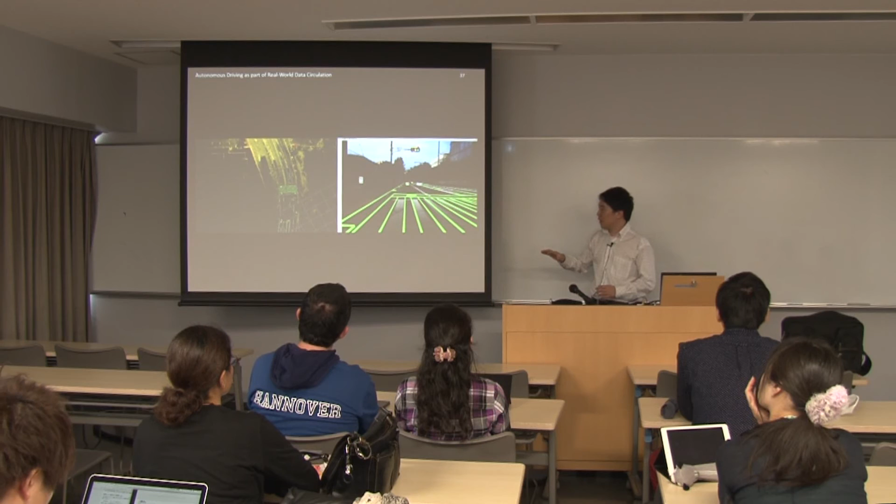Traffic light detection—so again, we know our location by 10 centimeters, and we have map information in the system, along with camera images. We can plot scanning sensor information onto the image, because the scanning sensor and camera are calibrated, so they know each other's relative position and relative angle. So the scanning sensor's data can be mapped onto the camera image. This means you can map three-dimensional information to two-dimensional: the scanning sensor is three-dimensional with x, y, and z, while the image is two-dimensional with only x and y. So it can plot three-dimensional data—red points mean far positions, blue points mean close positions. If you can do this transformation, since you have a map structured by three-dimensional information, you can plot map information onto the image.

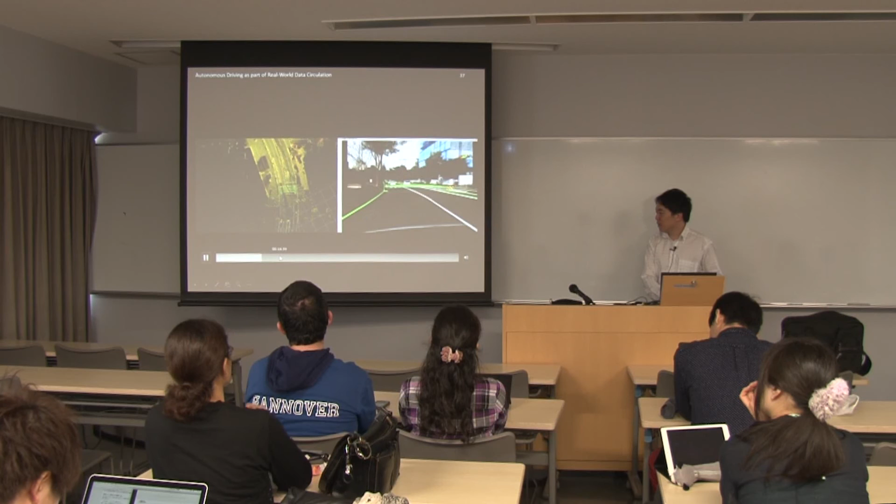So, we know exactly where the zebra crossing is, and similarly we exactly know where the traffic lights are, because it's already in the map, and the map has height information. So we can just plot the map information onto the image—we don't have to detect it, we just plot it, since it already exists in the 3D map. It's like pasting the 3D map onto the image, and then you know exactly where the traffic lights are.

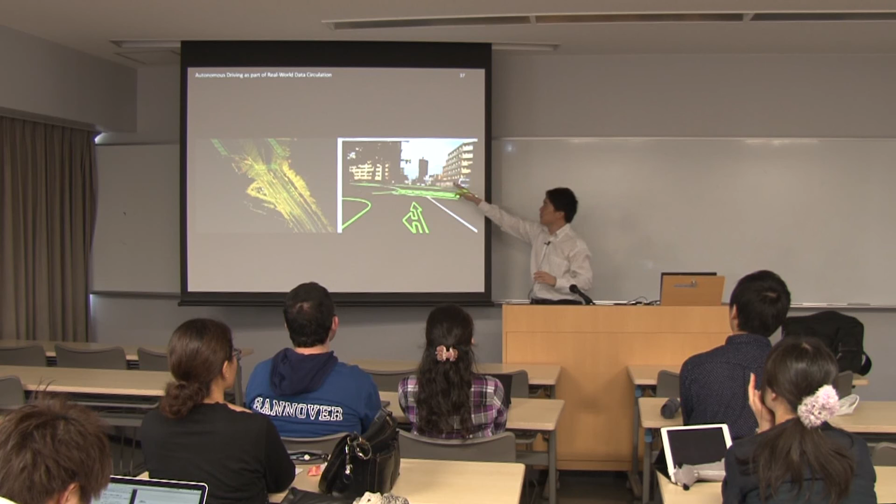But calibration is difficult—I think this is a data analysis topic as well. You can see a little bit of error in calibration. The real traffic lights are here, but the mapped or plotted data from the map information shows up there. This is calibration error—if the calibration were perfect, if the two sensors, the scanning sensor and the camera, knew the difference in angle and distance to each other perfectly, then the map data would exactly match the real world information. So we want to improve it so that it matches exactly.

So how do you decide whether to go through, you mean, when it's green or red? Yes, and sometimes we get confused about whether we have to go or not. Oh, I see—for a traffic light it's easy, right? If it's red, you stop, and if it's green, you go. But it turns yellow while we're going into the intersection.

That needs machine learning. So machine learning or rule-based systems—it's similar to natural language techniques, and often search engines like Google use rule-based systems. There are a lot of rules, like if the traffic light is yellow, and if your distance from the traffic light is less than, say, 3 meters, then you can go; if it's longer than 3 meters, you should stop. You can write a lot of rules to decide behavior. That's one approach, but the other approach is machine learning: you collect a lot of data from good drivers and make a model of drivers, then apply that to real-world decisions. You don't know why you stop, but looking at the model and filters created from machine learning, it just says, hey, stop.